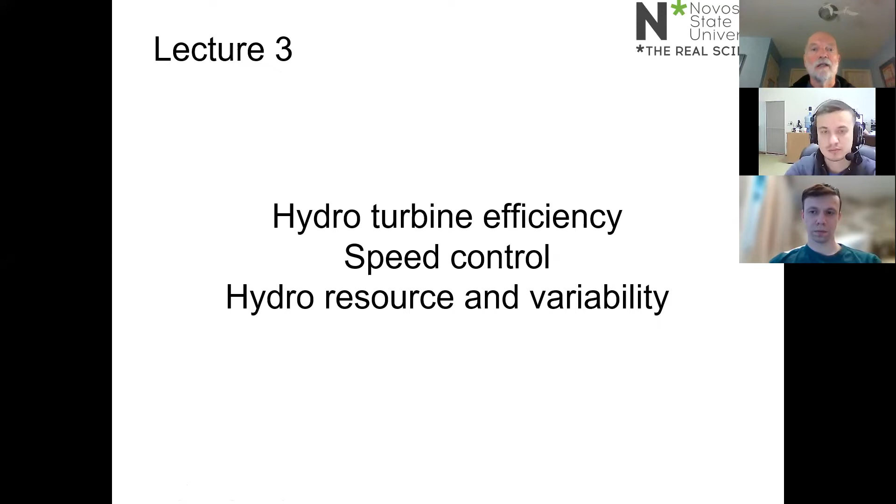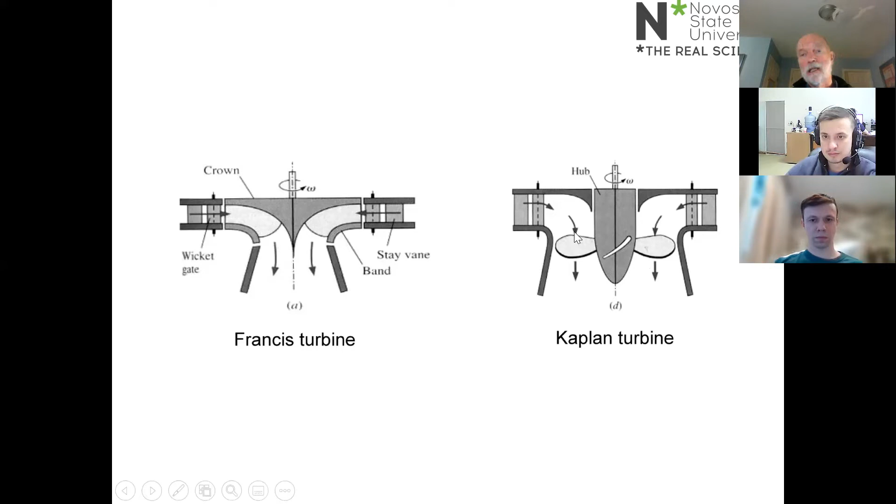Continuing our discussion of turbine types from the last lecture: the Francis turbine and the Kaplan turbine. This is what they look like in profile. The Francis turbine is a mixed flow turbine, because water comes in radially through the blades and exits parallel to the axis of rotation, whereas water flows through the blades of a Kaplan turbine more or less parallel to the axis of rotation.

When we look in more detail at turbine performance and matching a turbine to a particular site, we move away from the diagram I showed before with regions for where the cross-flow turbine sits and where the Francis turbine sits. We need to look much more carefully at the performance of individual turbines that would be selected if you were buying a turbine off the shelf for a particular site.

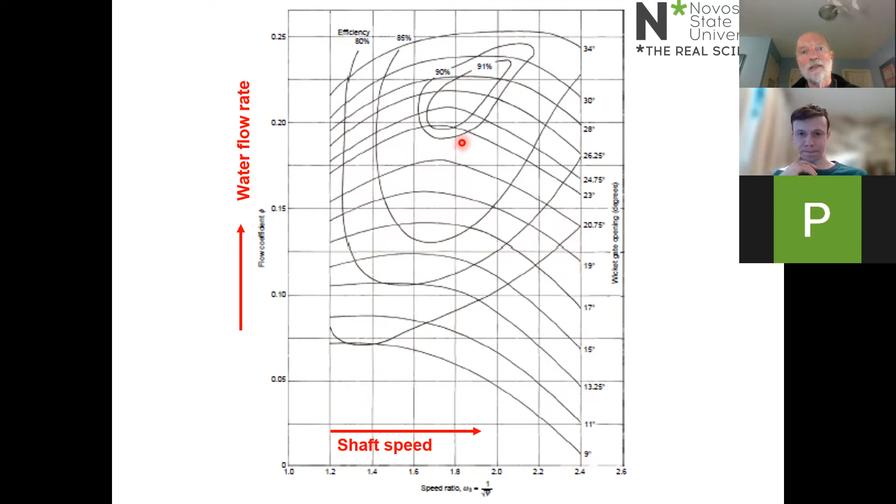Normally, you want to operate your turbine in its most efficient range, and you can see contours of constant efficiency on this diagram, including the highlighted contour for 91%—that's the region where ideally you'd operate this turbine. So after doing a basic site assessment to determine your resource in terms of head and volume flow rate, you have to look in detail at the specific performance of the turbines. One thing we'll discuss in this lecture is how we adjust turbine performance for variations in operating conditions.

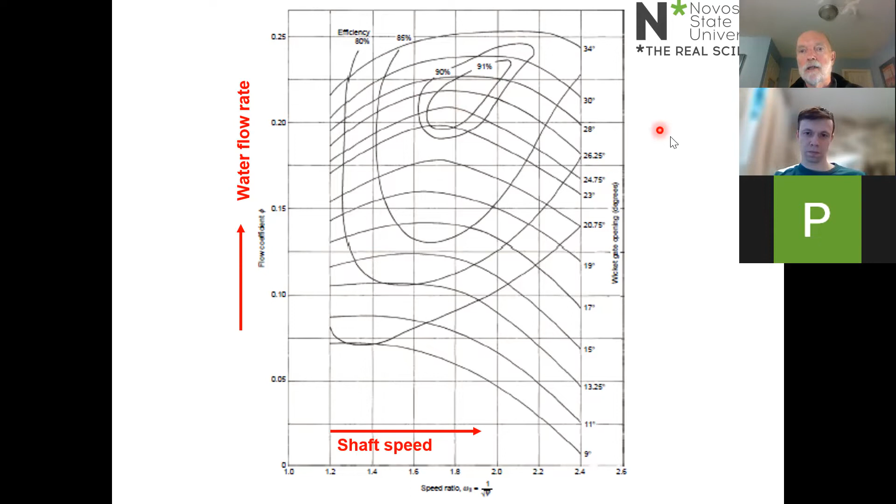I mentioned that the Francis turbine is the most common large hydro turbine. There are small Francis turbines as well, but they're not so common.

If you look down on a Francis turbine, you will see that the spiral casing, very much like the nozzle of the cross-flow turbine I was talking about yesterday, decreases in size as it goes round the circumference of the turbine.

The reason it decreases in size is that there is water going from the spiral casing through the wicket gate into the blades on the total periphery of the turbine, because you want as many of the blades as possible to be acted on by the water coming through the spiral casing.

So the wicket gates here can be set to different angles, and those angles are usually used when you have a situation of, say, a varying flow rate through the turbine.

If, for example, there's a drought and your dam water levels are dropping down, you may have to reduce the power output. When something like that happens, it's usually the case that the head available to the turbine does not change substantially, but the volume flow rate changes.

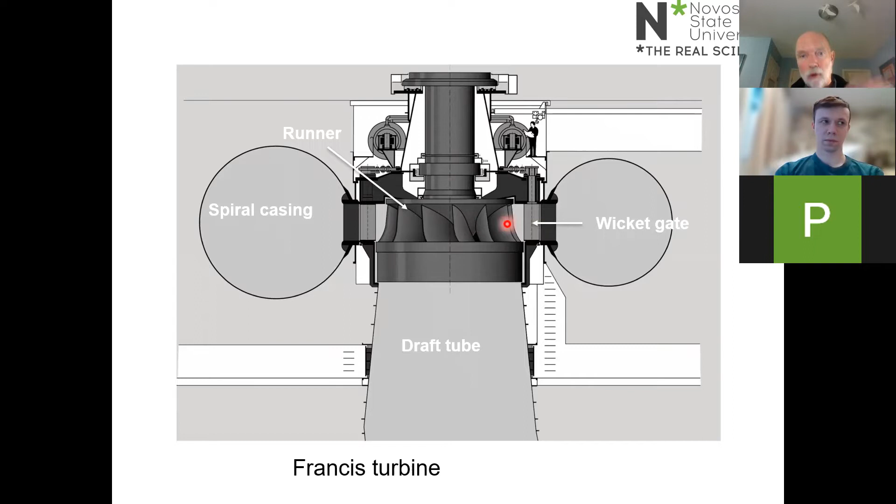In the old days of hydro turbines, the generator ran at a constant speed, which meant the runner had to rotate at a constant speed. So if there's a change in the volume flow rate, that is normally handled by changing the angle of the wicket gates. We'll have a look again at some of those ideas later on.

You can see the outlet of the turbine. I forgot to mention from the previous slide, that goes into the draft tube. The draft tube is a diffuser that sits below the turbine and takes the water away from the turbine.

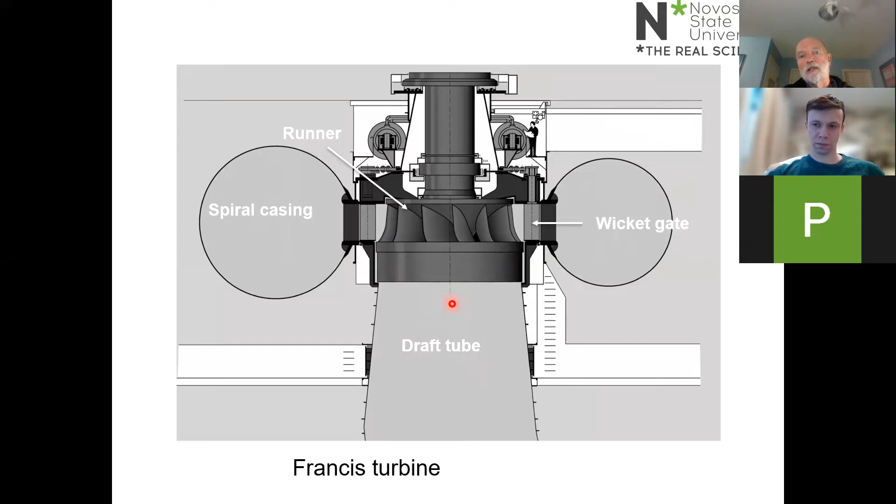That draft tube may appear to have not a very significant impact on the performance of the turbine, and that's generally true if the turbine is operating at its most efficient point. But when you get into off-design points, when you have a reduced flow rate or something like that, the flow in the draft tube can be very problematic.

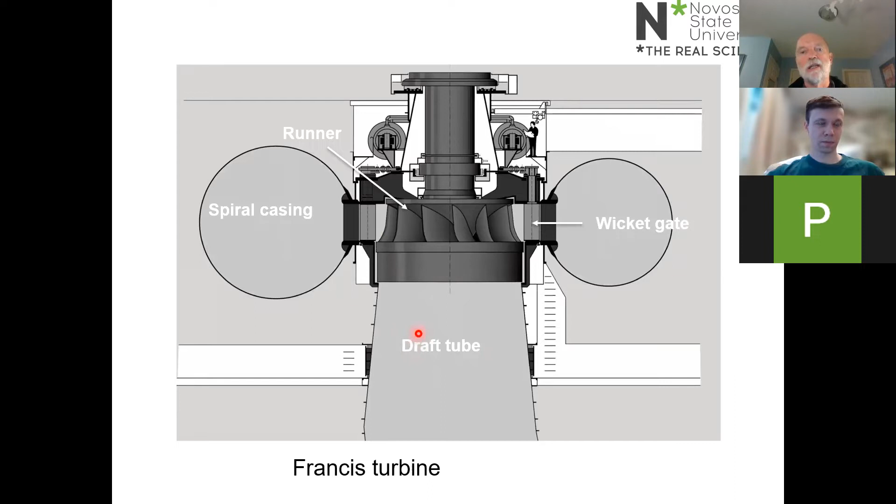A lot of the research done by Ivan's colleagues in Novosibirsk has been about what happens in the draft tube, particularly at off-design conditions.

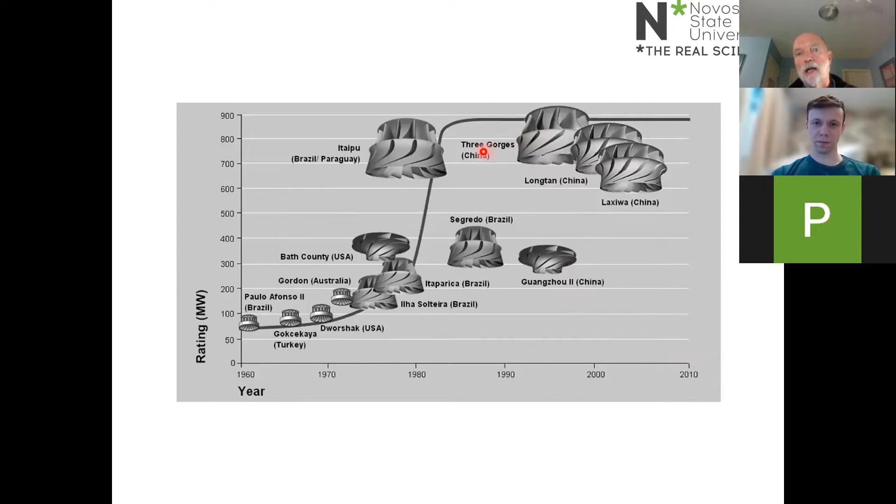Just to give you an idea of the size of modern hydro turbines, this graph is pretty old by renewable energy standards. It finishes in 2010, but as far as I know, there haven't been any larger turbines built than the Three Gorges turbines in China.

This was an installation at the end of the last century. The turbines, I think, were rated at 875 megawatts.

I mentioned in the last lecture the Ethiopian Renaissance Dam, which is currently the biggest hydro turbine project in the world. The turbines for that dam will be Francis turbines as well, but they are rated at somewhere around 400, I think about 475 megawatts.

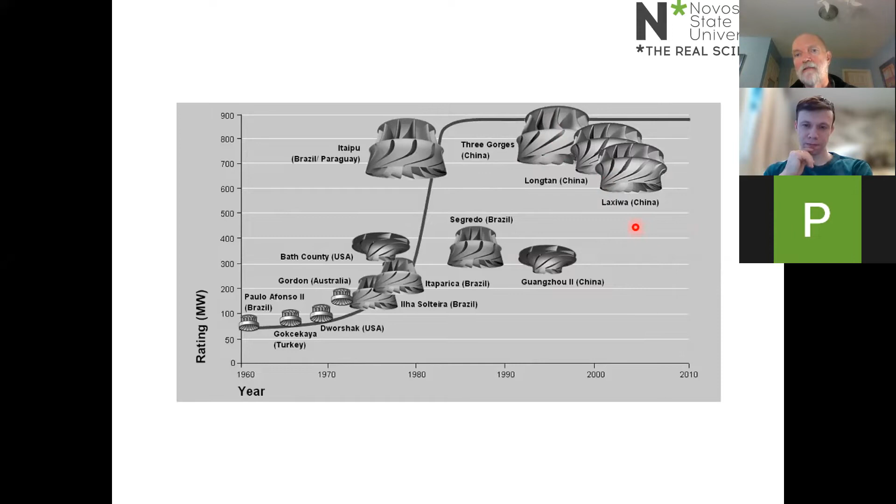The other feature to note about Francis turbines is that from the shape of the guide vanes or the wicket gates, they have to be designed carefully. You can see that the blades in the runner of a Francis turbine are also quite complicated. The main reason why Francis turbines are not used for small scale hydropower is simply the complexity of the blading. Compared to something like a cross-flow turbine, this is actually quite a complicated geometry that is much more difficult to build.

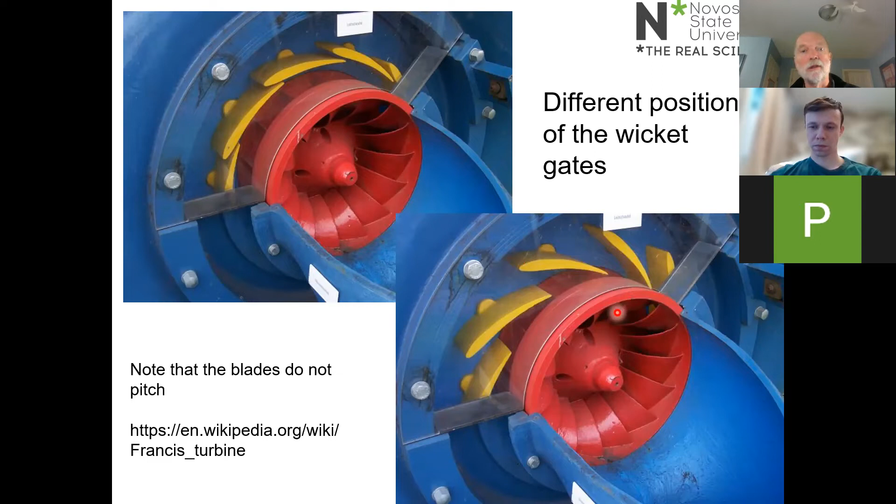Moving on in turbine types, there is a Kaplan turbine. As I mentioned before, it looks pretty much like the propeller of a ship. Think about issues of cavitation, which is one of the reasons why hydro turbine blades are typically larger or longer than wind turbine blades, to spread the load more evenly and reduce the negative pressures on the blades. This actually looks quite similar to a horizontal axis turbine.

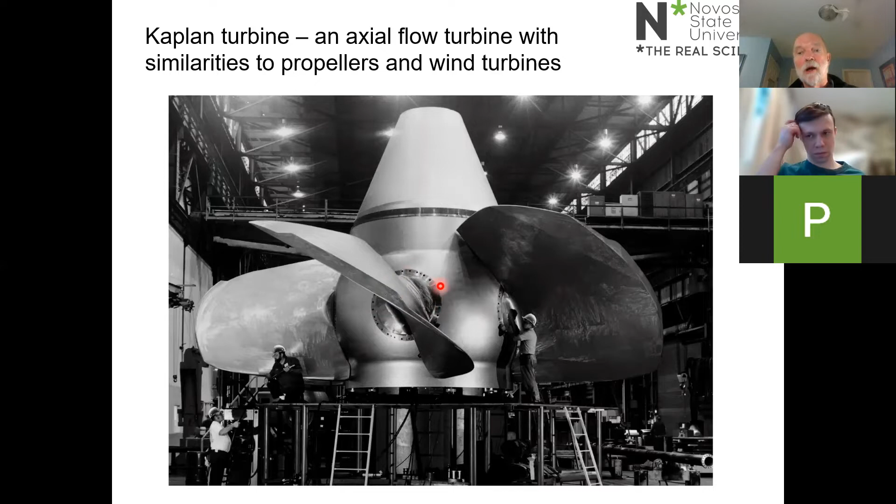A Kaplan turbine can have pitch control. In other words, these blades can be rotated, as I'm showing you with the laser pointer. Sometimes that sort of pitch control can be used as an alternative to wicket gates. When we get on to wind turbines, we will see the pitch control of a wind turbine blade is used extensively in the control of wind turbines, mainly towards the upper end of their power curve.

Permanent magnet generators are extremely important for wind turbines, and when we get on to wind turbines we'll be learning a little bit about permanent magnet generators and their use with wind turbines. The more poles that the generator has, the lower the angular velocity needed to generate a particular frequency. So this tells me that this Kaplan turbine has a large magnet generator, which probably means that the angular velocity of this turbine is relatively low.

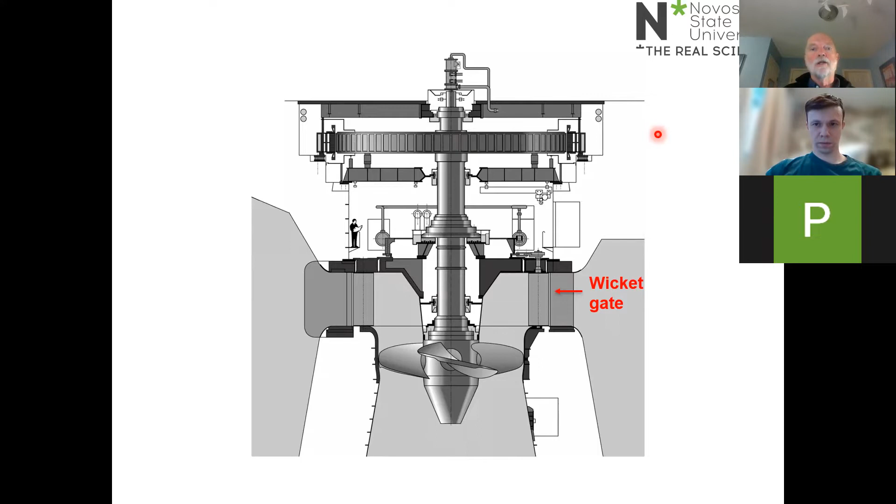If I say the term water hammer, you probably don't understand it. Maybe Ivan knows the Russian equivalent of it.

One thing I haven't mentioned is that when we do the hydrodynamic analysis of hydro turbines, we assume the water is incompressible, that its density doesn't change. But that's not entirely true—the density of water can change minutely if there's a significant pressure change. If you have a turbine like this Pelton turbine with a valve before the nozzle, and you suddenly turn off that valve to stop operation, that can generate standing waves in the penstock. I can't tell you exactly how this happens since I've forgotten the theory, but those waves, if you don't have something like a surge tank, can damage the pipe equipment. A surge tank is just a tank open to the atmosphere that allows the water level to go up and down slightly to absorb those waves. This is called water hammer in English—I'm not sure of the Russian equivalent.

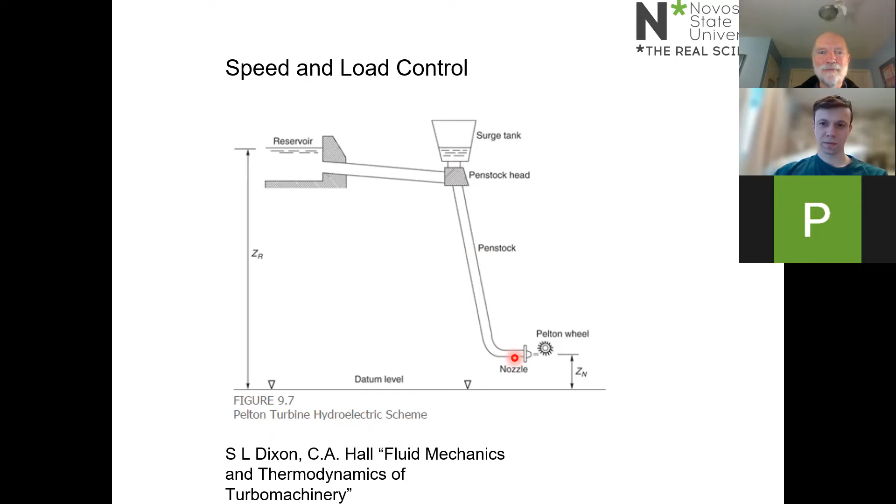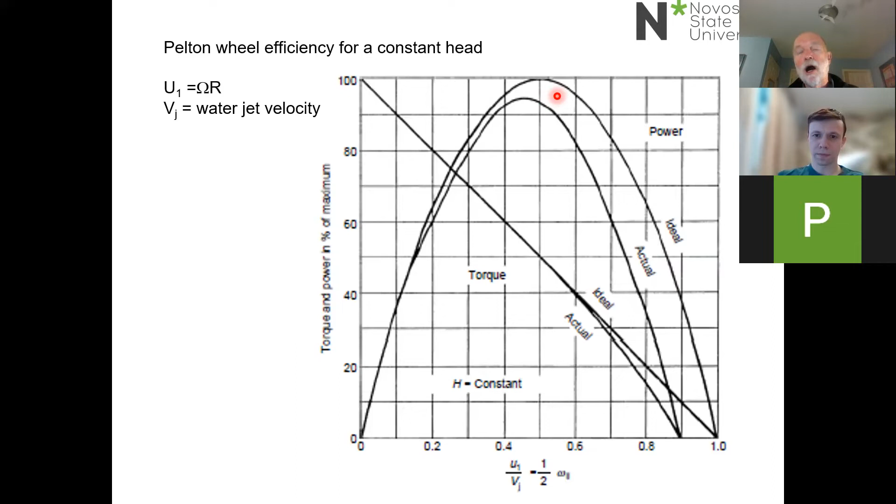So if you could operate a Pelton turbine in a vacuum, you'd push the actual efficiency curve much closer to the ideal curve. I think that's extremely surprising, because it means simply aiming a jet of fluid at the buckets and letting it rebound can produce a surprisingly efficient turbine. The Pelton turbine has a particular niche in the market because it's the best sort of turbine for high heads and relatively low flow rates.

Now we come to looking a bit more at how we control the operation of a turbine, and again the Pelton turbine is a relatively simple example. The basis of what I'm going to say is this observation: if you have a turbine installation, it's more likely that the flow rate will change rather than the head. With a Pelton turbine, you won't make a substantial difference to the elevation difference between the dam's water level and the turbine—you'll make a small difference. If there's a drought, that elevation will be lower, but the change is probably small relative to the remainder of the elevation difference.

The other thing to consider, looking at the equations for frictional losses we studied yesterday, is that the frictional losses depend on the flow rate. So if you change the flow rate, you change the frictional losses, which changes the effective head available to the turbine. However, again, that change isn't going to be large. So the usual situation with hydro turbines—say you have to preserve the water level in the dam because of a drought, or you have to reduce flow rate to accommodate a reduction in power output as told by the system operator—is that what you have to do is change the flow rate at more or less a constant head.

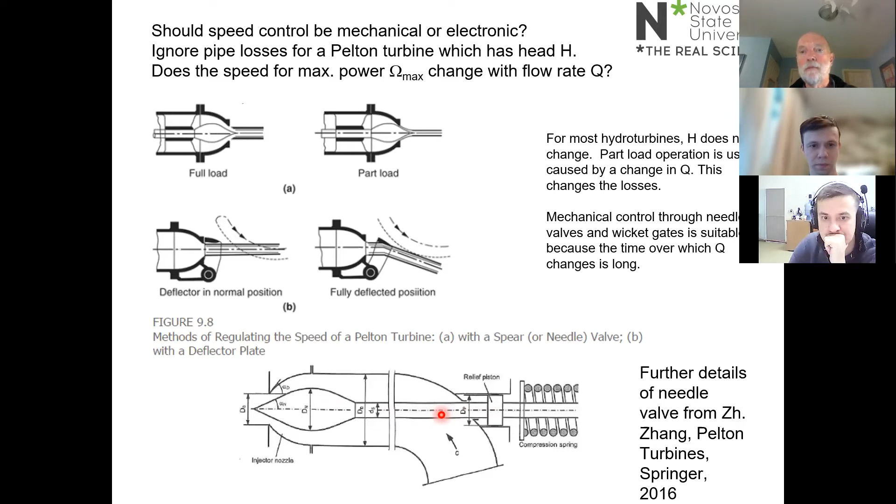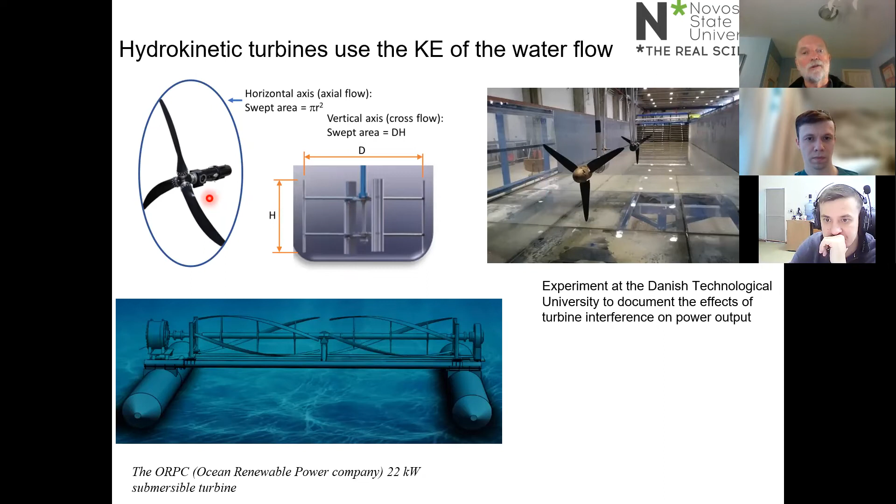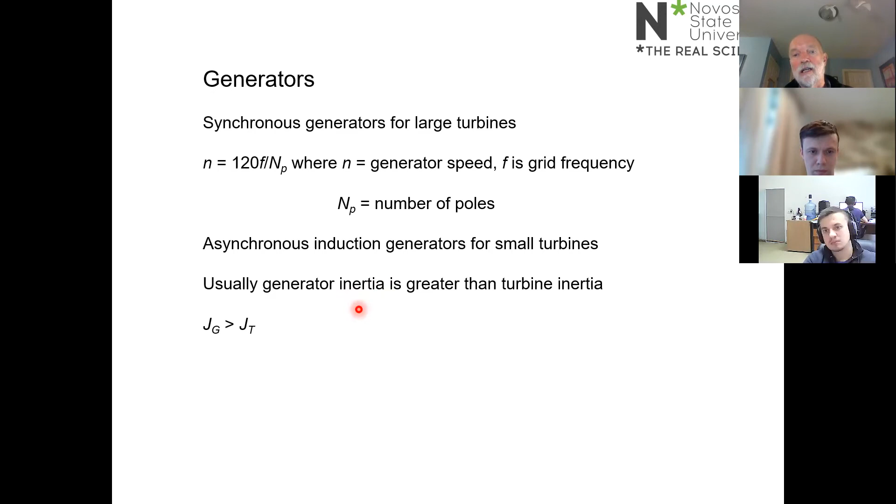I'll be talking quite a bit more about the structure of generators and how they work when we get on to wind turbines. One important thing for what I'm going to say next is that usually the generator inertia is greater than the turbine inertia. When we get to wind turbines, we have the reverse situation, because wind turbine blades are large, the blade inertia is usually significantly greater than the generator inertia.

What's happened since hydro turbines were first developed, at the same time as the explosion of the wind energy industry and the photovoltaics industry, is that the power electronics now available are able to handle situations where omega and Q can vary randomly with time.

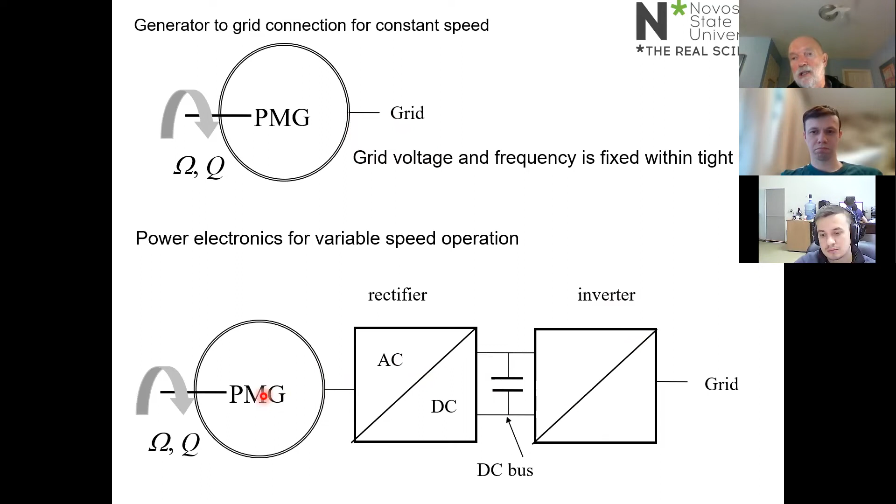This is what hydro turbine installers had to do when hydro turbines first became popular at the beginning of the 20th century. This is what you can do now if you have to. So even if you have a hydro turbine, you don't necessarily have to design it so that the generator is producing all the time the exact frequency of the grid.

I'll move on to that question again when we come to the section on wind turbines. What I want to do now is talk about the response times of hydro turbines, because this is an extremely important aspect of hydro turbine use in the context of electricity systems that have a large amount of renewable energy.

I talked a little about the reason for that in the first week's lectures, that if you have a lot of wind power and or solar power on your grid, you're going to get significant fluctuations in both the total power available to the grid and also the individual wind farm and solar farm power. If you're operating an electricity grid like that, you need other generators able to respond to those fluctuations. We saw from examples how rapidly wind power can fluctuate with time.

Hydro turbines are one of the technologies very suitable for that purpose. Gas turbines are another technology very suitable to be ramped up and ramped down with wind and solar power. Also, most forms of storage are able to ramp up and ramp down quickly as well.

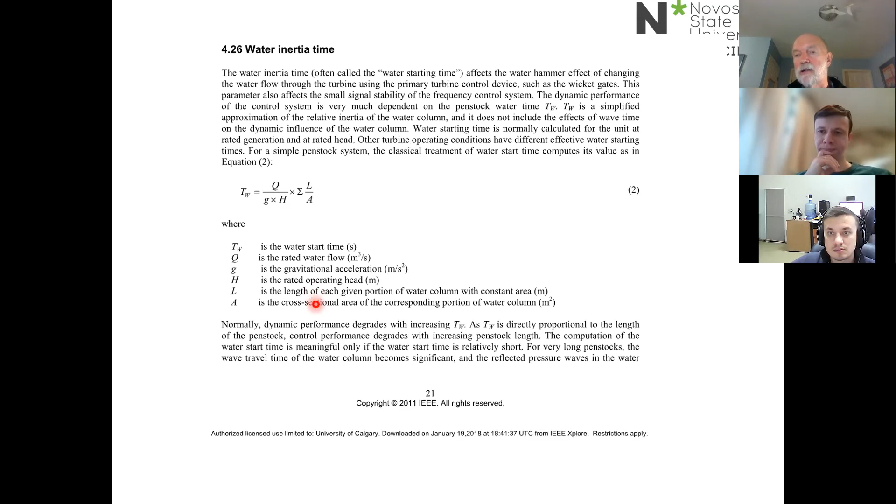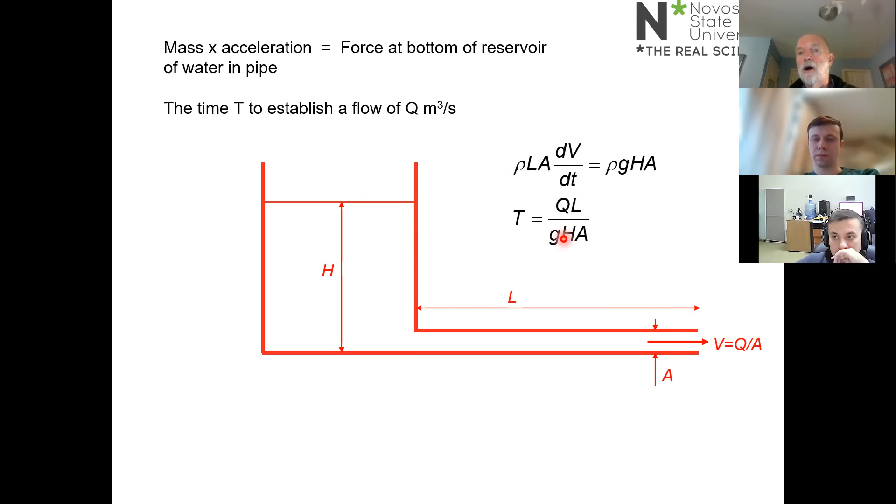So basically, the idea is that at time t equals 0, there's no water coming out of this pipe. At time equals 0, any restriction at the outlet is removed. This equation holds, and therefore the time that's required to get up to full speed is given by that formula there. So that's one part of the time response equation.

The other part of the time response is what's called the mechanical inertia. In other words, if you have something massive like a Pelton wheel, then it's going to take the Pelton wheel a certain amount of time to reach full speed.

And we saw from what I said about the needle valve and how that controls the water in the jet, or the volume flow rate in the jet, the speed of the Pelton turbine that you need is more or less independent of the power output. So no matter how much power the system operator has asked you to provide in the next 10 seconds, you've got a fixed speed that you have to get your Pelton wheel up to.

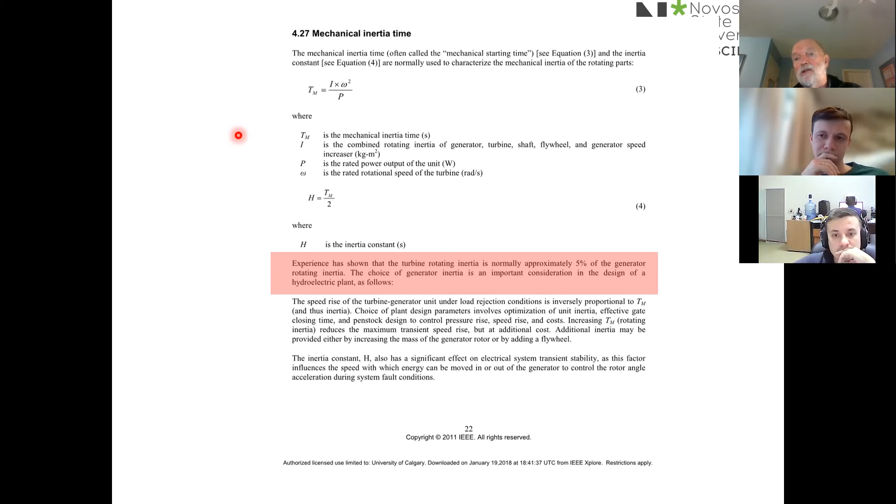They do interact because obviously the velocity coming out of the nozzle of a Pelton turbine, its variation with time depends on the water inertia, and the acceleration of the Pelton turbine is also going to depend on that velocity. So they do interact, even though their causes are fundamentally different.

And normally that is considered fast. If you have a hydro turbine that can respond to required changes in the load in that sort of time, then that makes it a very appropriate backup technology for the intermittent renewable energy generators.

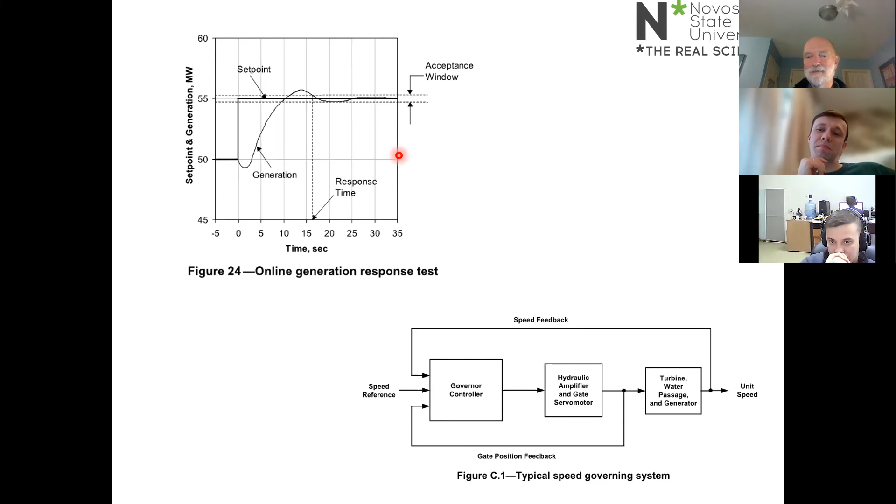Okay, so I didn't check the time. How are we going for time? I forgot to put my watch next to me. I'll just wait for a moment.